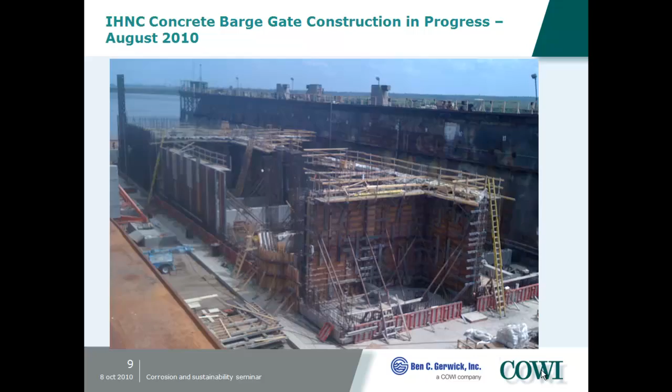About two-thirds of the way through this mid-deck level now. As I said, we elected to use high-performance lightweight concrete to help guarantee the service life and achieve the performance of opening and closing. They had to pump water in and out of it to lift it up and down and set it on the bottom.

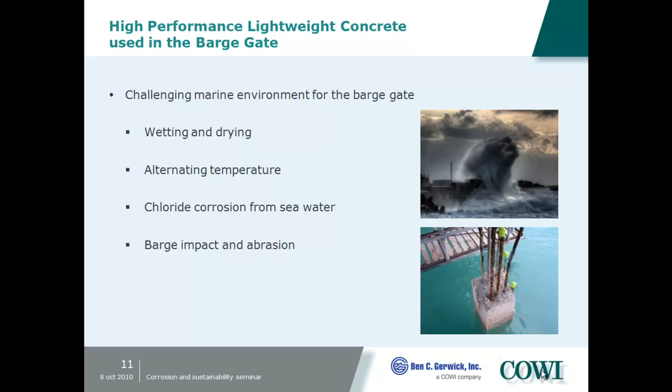So of course the challenge is that this is a brackish area. It's connected to the Gulf of Mexico, so there's a high potential for corrosion, and of course wetting and drying problems. There's potential for barge impacts since vessels going by through the pass could butt up against it. It doesn't snow very often in Louisiana, but I've been there when it was snowing, so it happens once every 20 years or so. It's the coldest tropical climate in the world.

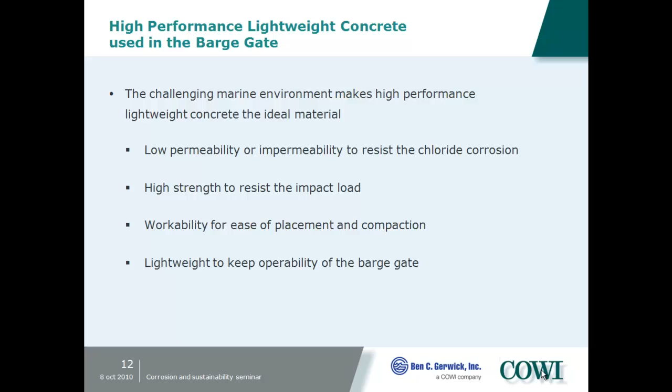So here are some of the challenges for making the high performance concrete. We wanted low permeability to resist chloride penetration, high strength to resist impact, and high workability because of all the reinforcing steel in there. We also wanted to keep it lightweight to help it float and reduce its draft, which allowed water to flow under it when it was setting down, reducing the mooring forces on it.

So here are some characteristics comparing high-performance lightweight concrete versus high-performance standard weight concrete versus normal lightweight and normal standard weight concrete. You can see that in some ways it's the best of all worlds except for cost. Since it was a small component, the costs were justified compared to the other options available at the time. Certainly Caltrans uses lightweight concrete periodically for bridge decks to get the inertia down for seismic loading, but here it was for buoyancy to reduce the draft.

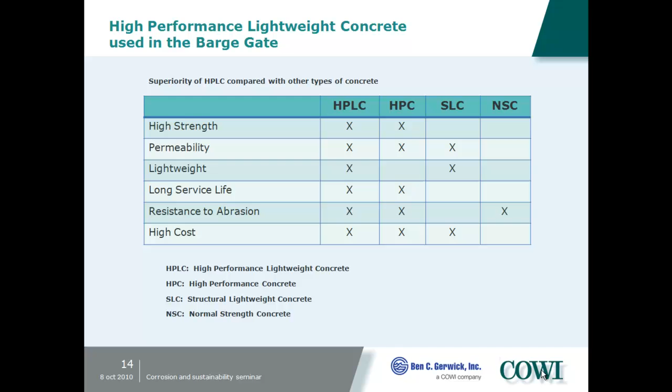But fortunately it also gave us better service life by decreasing permeability, and we had very good strengths on it, so we have this issue about service life that Eric was talking about. We had 4,000 psi after 3 days, more than 7,500 psi, which is often good just for standard weight concrete, and here we're getting it with semi-lightweight.

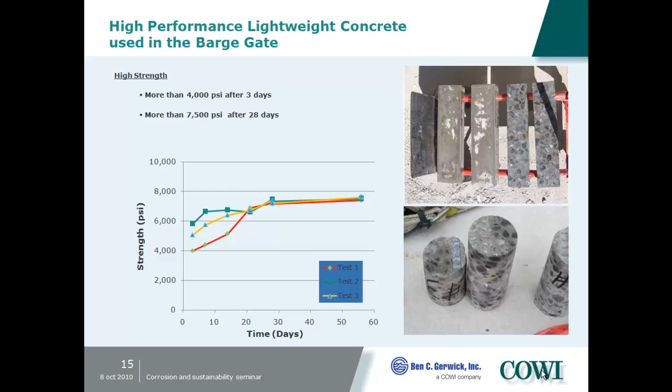I should point out that we used standard sand, standard weight sand. It was just the coarse aggregate that was lightweight, but you can see here the strength gain with time for different breaks.

As I said, the permeability can be very low, on the order of 10 to the minus 10 centimeters per second, compared to something that might be 30 times higher for normal strength concrete. In more extreme cases, you can have 100 times or more lower permeability, because the lightweight aggregate is slightly pozzolanic. It binds better to the cement binder, which reduces permeability. Also, it's harder for bleed water to accumulate under a porous aggregate. So it's a proven fact.

It also has very low chloride permeability, so there's this Coulomb test monitoring the flow. We did this on our mix design, and this is a relatively low Coulomb count, 300.

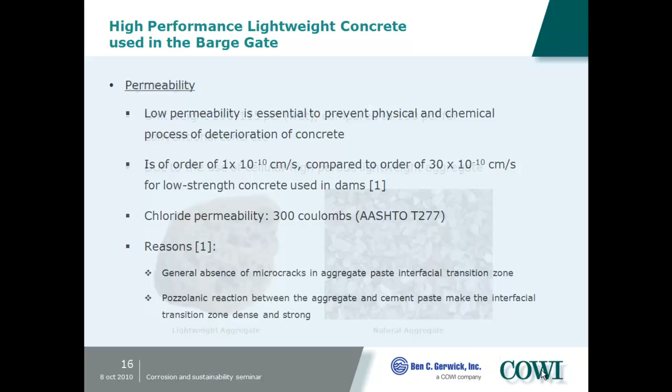And we achieved this - normally I think our average mix design here is about 112 pounds per cubic foot wet, and then if it hydrates, it could dry out with time. It should absorb less moisture because it has low permeability, so its density shouldn't be changing.

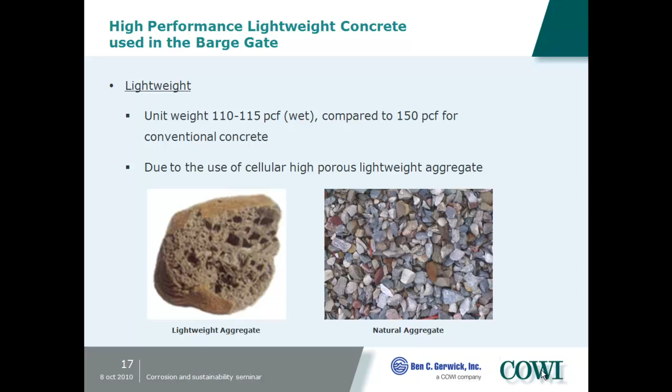For those who don't know, this is made from shale. You put it in a kiln and it puffs up like Cocoa Puffs, so it's almost like volcanic pumice in that regard. It's got a nice surface here to stop it from absorbing too much water.

So there was this big question about how you prove it had a 100-year service life. I did point out there were 9 levels of quality control review: the water district, the flood district, the division, the district, the headquarters, the Congress. So they all wanted proof - it wasn't just good enough.

And they refused to allow you to use stainless steel rebar. They just said the contractor couldn't find it in the amount of time that was available. It had been planned to be a temporary structure - now they want to make it permanent. And they wouldn't accept impressed current cathodic protection at the end.

We have used passive cathodic protection, or anodes, as Birgit showed. We used that on the Diablo Canyon intake structure, where we put zinc strips into the concrete, and that worked well there. But the contractor didn't want to do that here, so our options were getting more and more limited. So we did use these, as it was showing.

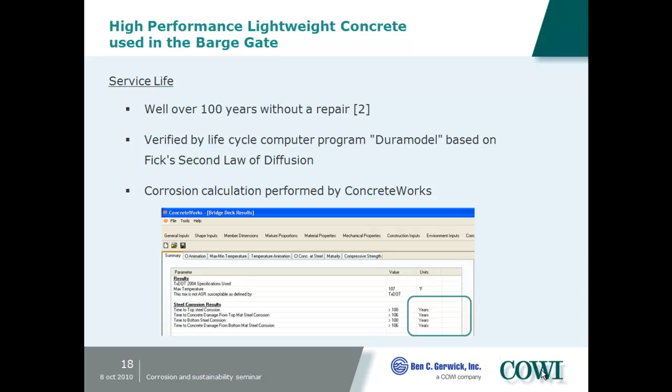She was showing 75-year service life, and then she had to do something else after that, so we didn't have all those options. So for whatever it was, we used this Duramodel, which uses Fick's law for getting the chloride in and then predicting a certain amount of life.

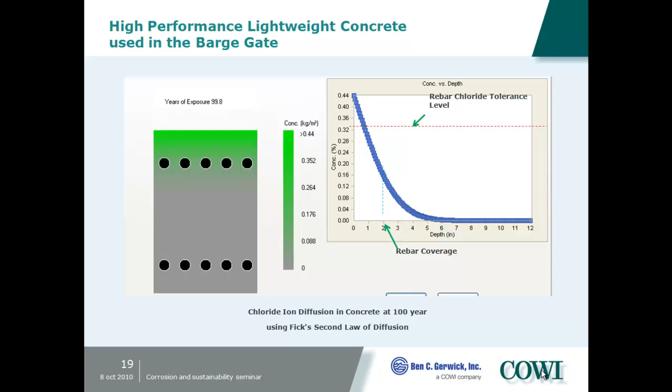And that would get us out a long ways, 100 years of exposure. You can see the cover that we had, 2 inches. You could add more cover, but then the thing wouldn't float, so we couldn't just add more cover to it. The code often goes up to 6 inches of cover, but that wasn't an option here. So as the chlorides are penetrating up to the steel rebar, it became an issue. We also had to look at creep and shrinkage in our assessment to try to minimize construction joints and maintain - it's not just the quality of the concrete, you have to consider the construction sequencing that goes on here.

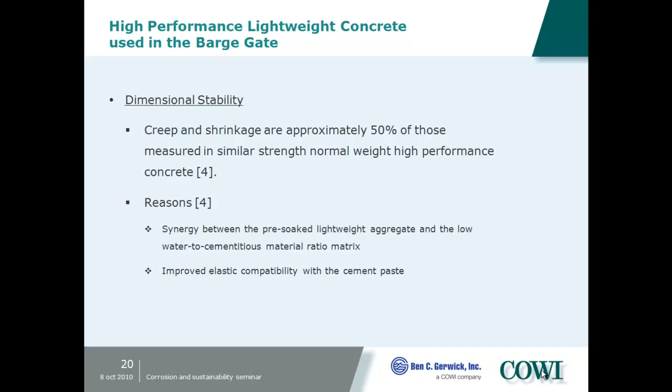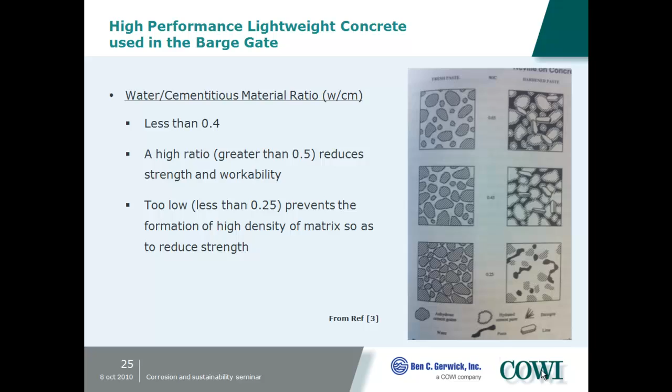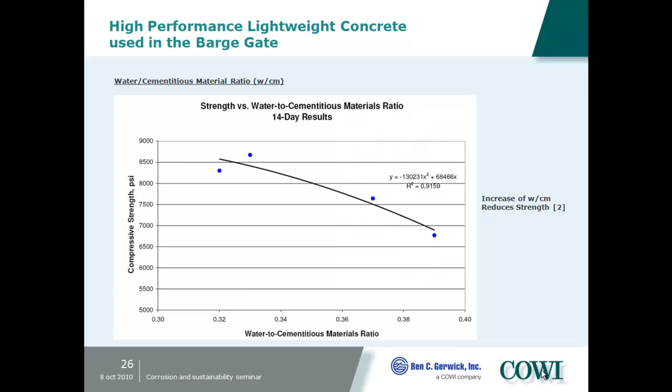Here's the good water cement ratio. We wanted to stay less than 0.4 to try to get the low permeability. I think the water cement ratio here, I probably went by it fast - it's 0.38, right Richard? So this does show compressive strength as you get up here. We're at least over 7,000 psi with that water cement ratio, which exceeds the design criteria.

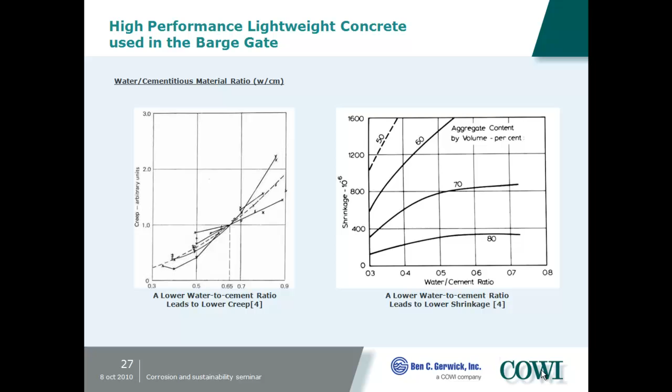So here's other influence on creep. As your water cement ratio goes up, your creep goes up, so that's something you want to control. And you also want to get a good amount of aggregates in there to reduce shrinkage, but also the low water cement ratio reduces shrinkage as well.

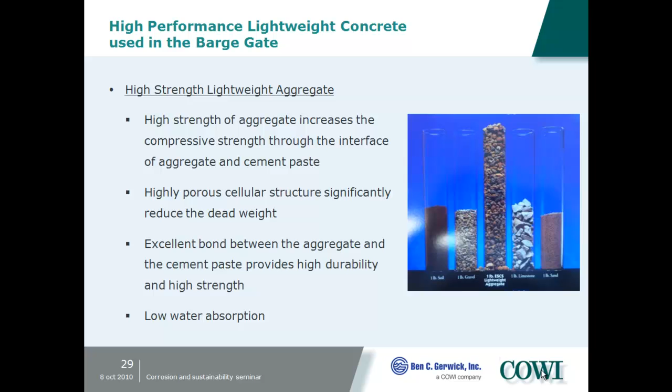So again, we used the Stalite lightweight aggregate. It is high quality, comparable with the strength of the cement. When it fractures, it goes right through the paste and the aggregate, whereas with standard weight it often goes around it. That means there's less cracking, so even under operation there'd be less cracking occurring, so less avenues for chlorides to get in.

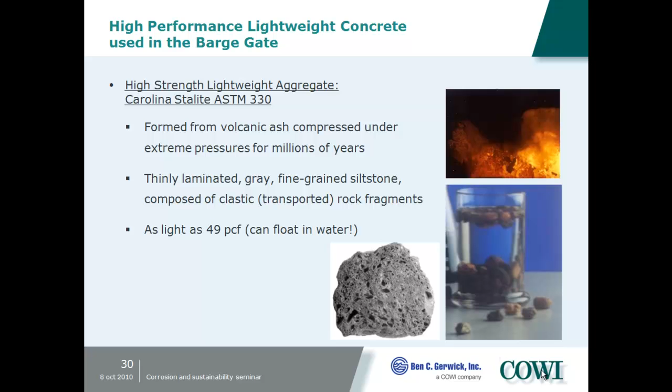Well, I don't know about this thing about formed by volcanic ash, but this is used as shale that was expanded in the kiln. I think my person who helped me with this slide might have made a mistake, but it is light enough to float.

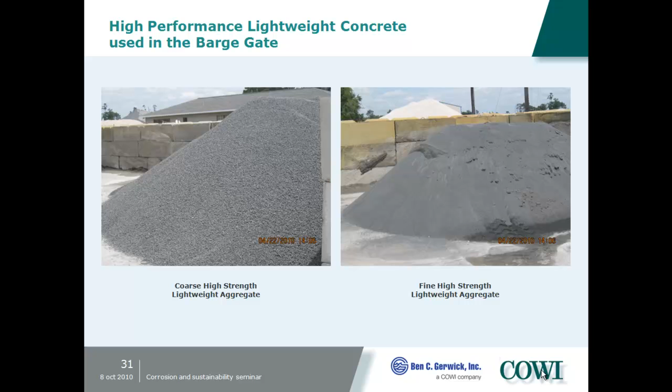So this is how the contractor was stockpiling it. He had to pre-soak it a little bit.

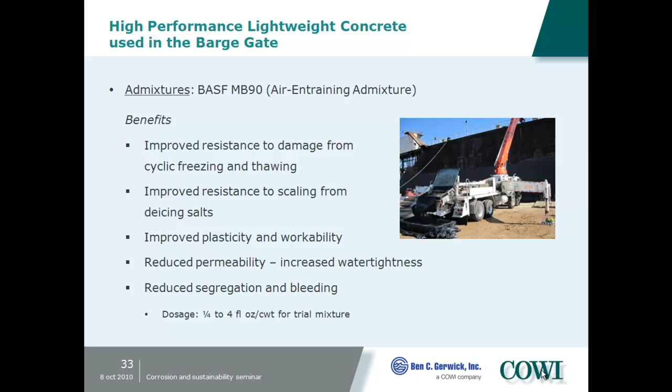And again, we did use air entrainment. It improves and decreases the permeability, decreases the bleeding.

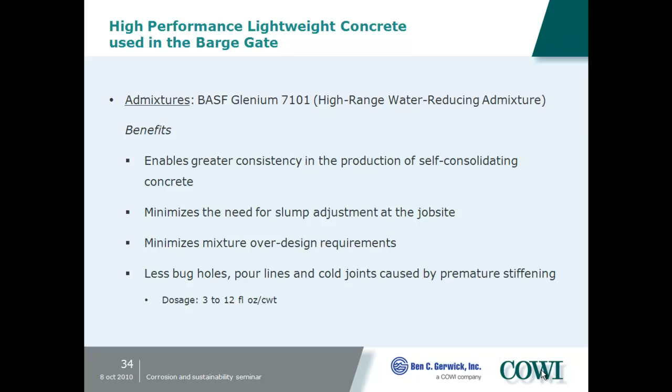Here's a high-range water reducer to try to get around all the rebar. Mid-range water reducer, try to extend its slump life, since often the high-range water reducers lose slump, and this provides a backup at a good price. But it also has other advantages with regard to finishing with this admixture - it improves the concrete durability against freeze-thaw, this particular admixture.

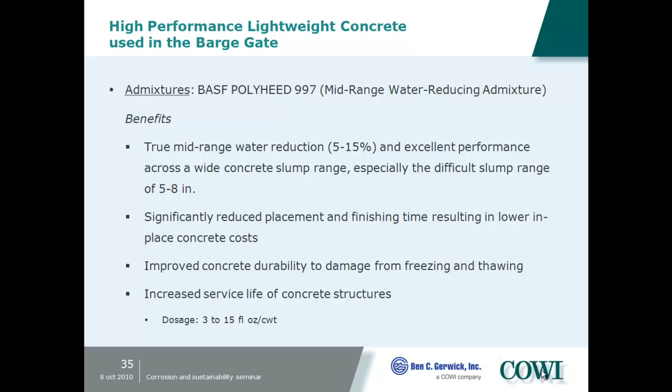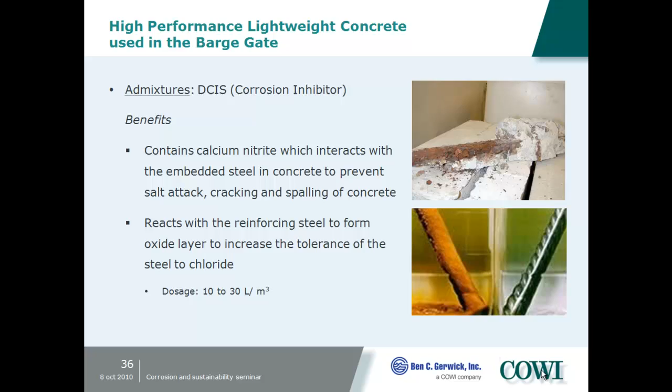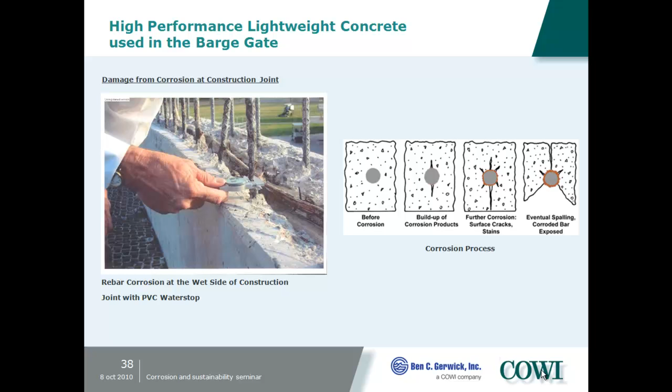But again, we had to look a lot at the joint construction here. This is not our joint, but that's a typical problem where there's a water stop. And if you don't get the joints right, you can have corrosion happening that could lead to spalling.

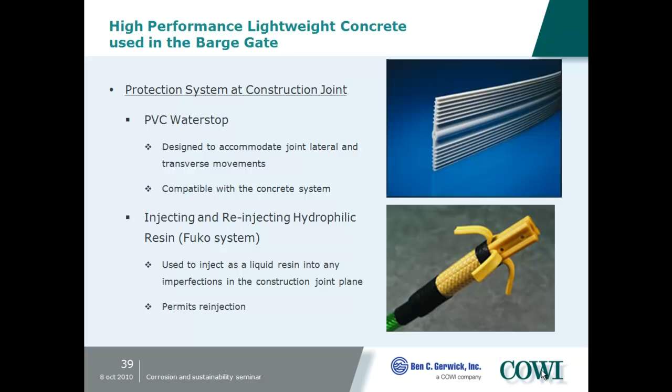And to help provide a guarantee of that, on top of the water stop, we also have this Fuko injection, re-injection with a hydrophilic resin, to make sure and guarantee that there isn't a problem. I believe at one place the contractor forgot the water stop, but he got the Fuko in there so we could inject it. So here's the Fuko lines going down the side and the water stop in the middle.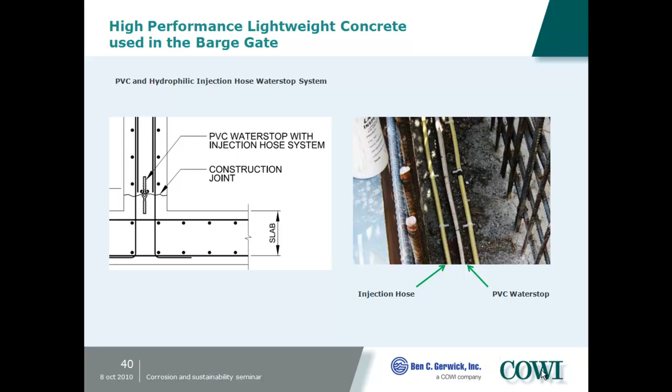And so often for offshore platforms, concrete gravity-based platforms, they just go with the injection piping, as it simplifies the construction issues. So this shows in a joint where you have the resin being injected.